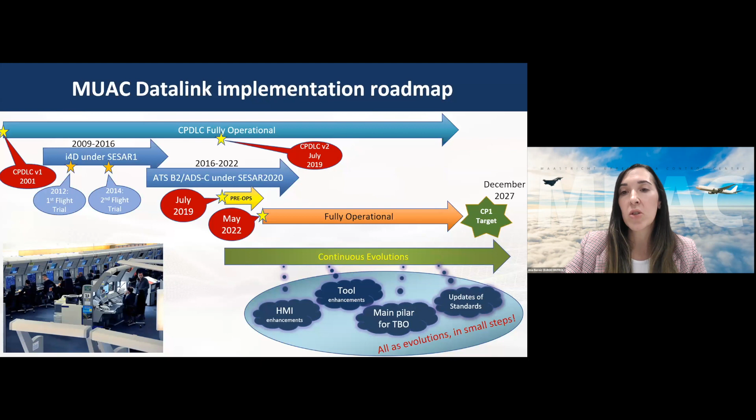And in July 2019, CPDLC version 2 became operational, and ADS-C pre-operational. Only a group of controllers had this functionality available for validation. And because the assessment was very positive, in May 2022, in the full ops room, more than 600 controllers had this functionality available on the screen. And we plan to continuously evolve what we have right now.

Here on the screen are some of the facts on Datalink, daily average of MUAC. You can see that we manage more than 5,000 flights per day. 83% of this traffic is Datalink equipped. So we have a lot of experience of that. And even if at the moment it's mandatory to log on with our center, still today, more than 50 times per hour, our ATCOs are requesting the pilots to log on. And this is a huge amount of time.

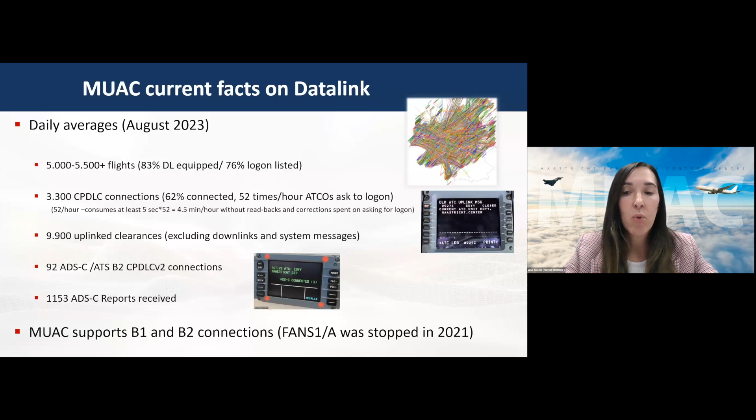Regarding ATS B2, we have at the moment only 152 aircraft equipped with this new technology. All of them are Airbus, but we expect that in the near future, for 2028, there will be other aircraft manufacturers implementing this fancy technology. And usually daily we have like 92 connections of these aircraft.

What do we present to the controllers on the screen regarding ADS-C? So controllers can see the airborne trajectory, so the extended projected profile, the EPP, which can contain up to 128 waypoints. And they also can see that graphically, it's this pink line.

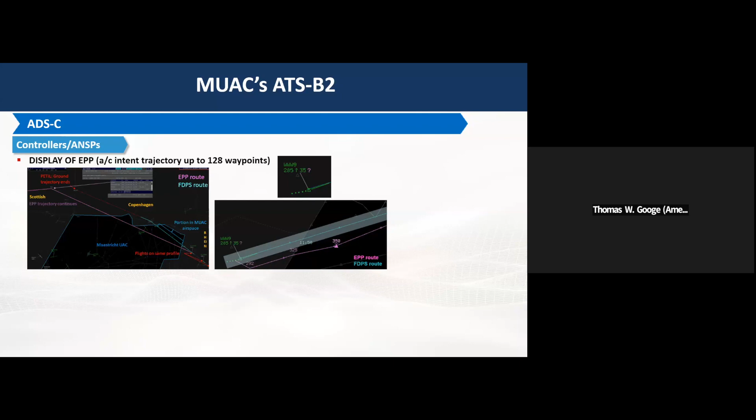Sorry, there is someone talking. Okay, I'll turn it back. Sorry.

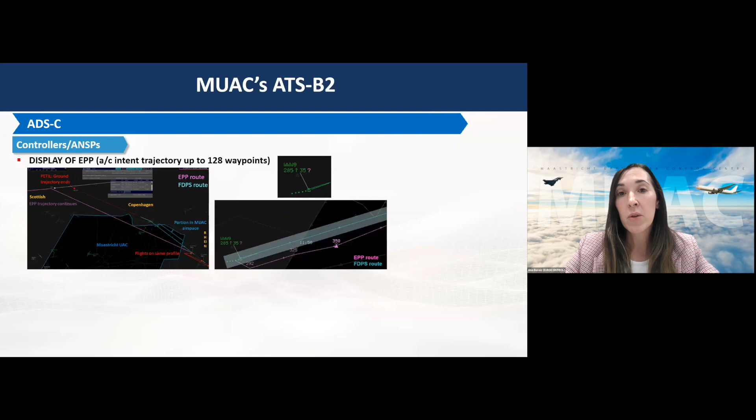Sorry, yeah, I was saying that the EPP trajectory is there on the screen in pink. And our system is all the time checking for discrepancies between the air and the ground trajectory. And if there are problems or discrepancies, then there is a question mark presented to the controller so that they can solve it.

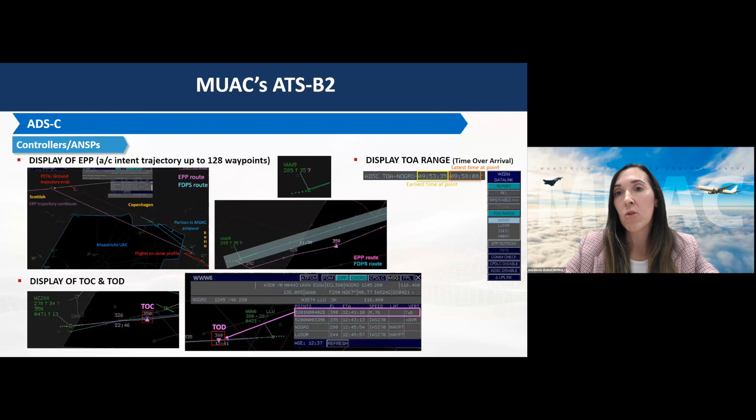They also can see the top of climb and top of descent as received from the aircraft. And they also have functionality to request an interval for the earliest and latest time the aircraft can make it over a specific point requested by the controller.

With all these functionalities, we see already many benefits for the controllers. The first one is the big safety enhancement because they have much more information of what the aircraft intentions are, the trajectory, the cruise level. We also have a workload reduction and higher efficiency because there is this push to load functionality on the aircraft side.

And that makes it easier for pilots, but also for controllers to uplink more complicated clearances. And also they can be checked that they are properly implemented thanks to the EPP being downlinked. Apart from that, we see that as the first step for automation on the system, and controllers can provide a better service because they can try to give more shortcuts when they see the EPP trajectory, even going further than our airspace. And also they can try to accommodate for less steep climbs and less steep descents.

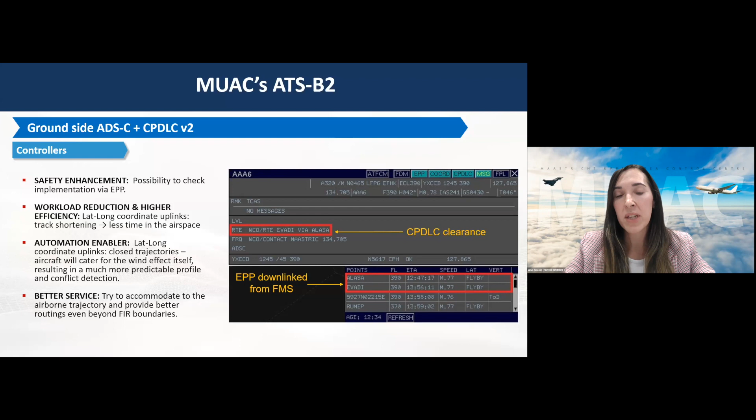For the pilots, this also brings workload reduction and higher efficiency. The lateral clearances that are loadable, it's a big advantage. And then, of course, because controllers can see much information on the screen, they don't need to ask pilots via radio for information. So at the end, this is saving also time for the air crews. And we see that with this CPDLC version 2 and the push to load functionality, we get 25% quicker response compared with CPDLC version 1 on complex clearances.

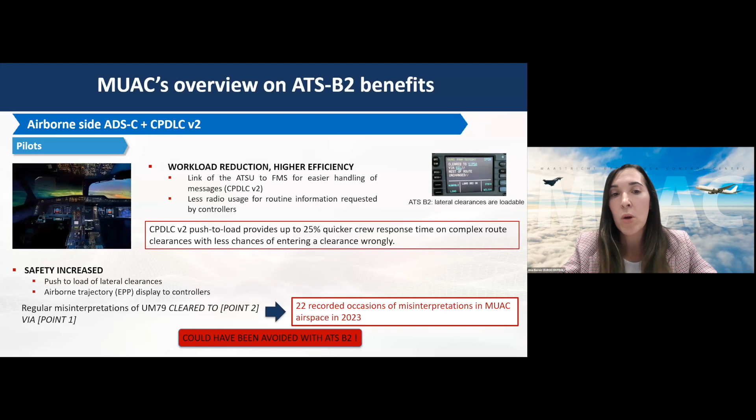Apart from that, there is also a big safety increase on the airborne side because the push to load makes things easier and there are then, of course, less errors from the flight crews. And also we have seen that sometimes there is a lot of misinterpretation on the pilot side with certain clearances, for example, with UM79, which could have been avoided if ATS B2 would have been used.

For the airlines, mainly we see the benefits of having more environmentally friendly flights because they will get more optimized climb and descent profiles thanks to the display of the top of climb and top of descent. Controllers will try to accommodate to those if the traffic allows, of course. And we have here some examples.

And also the flights can get more optimized routes and fewer miles flown, thanks to the fact that we can see the intentions of the trajectory of the aircraft beyond our airspace, and try to accommodate some coordination with the downstream centers. We can also uplink lat-long coordinates, which is a more advanced functionality only for B2 compared with B1, instead of giving longer reroutings.

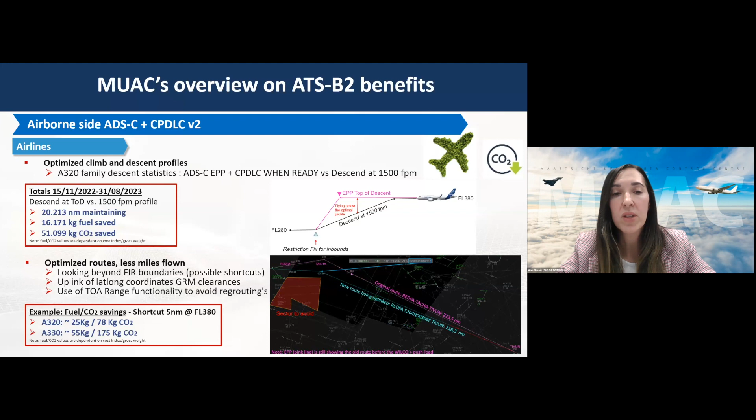For example, in the example that you can see in the bottom right of the screen, it's only a shortcut of 5 nautical miles at flight level 380, but it can mean for an A320 family a saving of 25 kilograms of fuel and 78 kilograms of CO2. And for a 330, 55 kilograms of fuel savings and 175 kilograms of CO2 savings.

So as a summary, for controllers, it's a big safety enhancement. They have more information on the screen.

The system is automatically checking for discrepancies. There is a workload reduction and also an improvement in efficiency because they are also using less the radio frequency for checking. They can provide better traffic management and better conflict detection because we are including parameters coming from the aircraft in our system to have a more accurate calculation.

For pilots, it's also a safety enhancement thanks to the push to load button, workload reduction, and also improving efficiency. For the network, we expect that because of the ADS-C common service introduction in Europe, that will provide the ADS-C information from the takeoff of the flight till the landing, we will be able to have a better prediction of sector loads and runway occupancy times, also leading to more effective traffic management in collaboration with all partners, and that will be enabling capacity increase.

For the airlines, as I was saying, the main benefits for them is that they will be saving fuel, saving CO2 emissions, and also time saving thanks to the optimization of the profiles, less steep climbs and steep descents, and also route shortcuts thanks to the EPP and the CPDLC version 2. And in general, that will make the flights more environmentally friendly, more green.

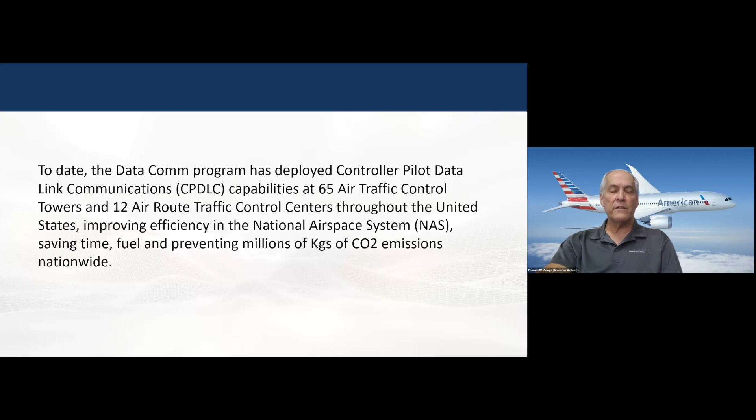So to date in the U.S., the domestic Data Comm program, we have capabilities at 65 towers and 12 air route traffic control centers throughout the domestic US. And we're going to talk about some of the statistics for time, fuel, and CO2 emissions that were prevented. So we'll talk about that a little bit and where we are with the program.

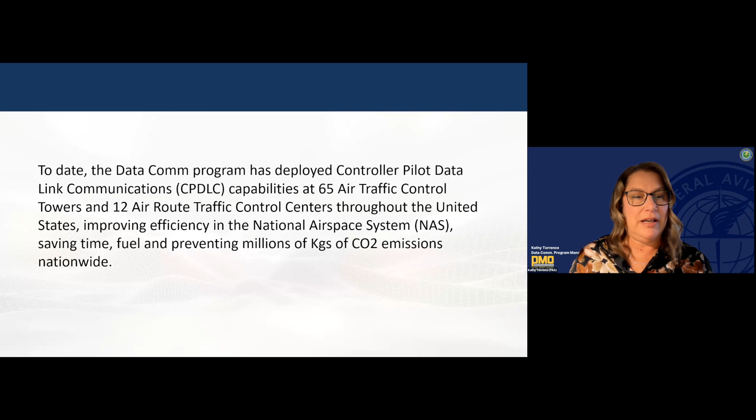So overall benefits here, again, we're providing those services between pilots and air traffic controllers, supplementing the voice communications capability. So there's no intent for Data Comm, or data link, to ever replace voice. This is a supplementary system, introducing and providing that data link between ground automation systems as well as the flight deck. And the messages that we share include clearances, instructions, traffic flow management, and also requests from the crew.

We actually have today with FANS the push to load capability already. So we're able to take advantage of those benefits that Anna mentioned are coming in the next segment of CPDLC in Europe. So again, controllers are able to deliver instructions with a push of a button, without having to be on frequency. And one of the real benefits that we see, especially with the push to load, is the transmission of complex instructions that can be directly loaded in through the push to load. And that really does save time. We'll talk a little bit about that, or what we're seeing on en route.

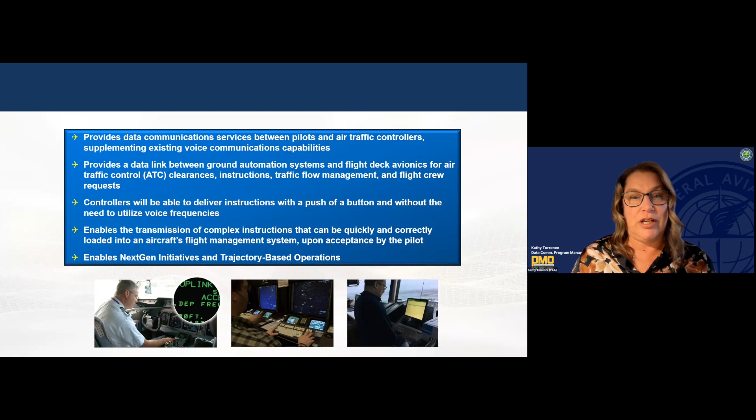And also from the US perspective, the implementation of Data Comm really provides the foundation for other upcoming NextGen initiatives like TBO and some others as well. And again, for benefits, we're very much what Anna said as well. We're reducing that communication time between controllers and pilots, improving rerouting around weather and congestion.

She had a great graphic there that showed that our controllers are able to, instead of having to go only with published points, basically trackball pick around weather or some other area that pilots need to avoid and get them as close as possible, which saves fuel. As well as we're able to increase that flexibility and accommodation of requests from users, which can save CO2 emissions. And then again, as I mentioned, we are able to provide that standard for other NextGen initiatives and TBO.

So this is where we are from deployment from a US perspective. The triangles are the 65 towers and their location. We have multiple colors going on here, so I'll explain a little bit about what that is. So for the centers that are colored in, that are green and purple, they are providing CPDLC 24/7 currently. For the ones that are purple, they have decided to accept the capability and have achieved an FAA milestone known as IOC, or Initial Operating Capability.

You'll see Jacksonville there is shaded kind of a peach color. They just started bringing up Datacom, and the good news is, as of last night, Fort Worth did the same. So we have a change in our map here. Fort Worth just came up, but in a limited capacity.

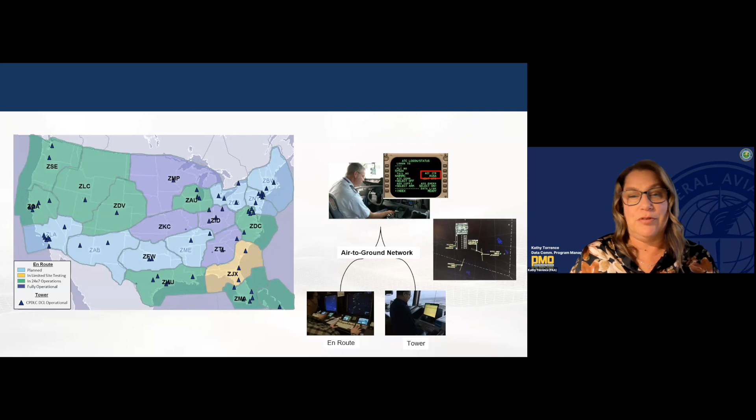Our original goal for Datacom was to have 5,000 equipped aircraft by this point in our deployment, and you can see we've more than doubled that. So we're really excited about the participation from our airline partners that are using this service. And then looking at some of the savings.

So just in August of 2023 alone, DCL at the towers have saved over 100,000 minutes of radio time, as well as airspace user time, 81,000 minutes there. We've cleared in just that 1 month alone over 272,000 flights and prevented over 3,000 readback errors.

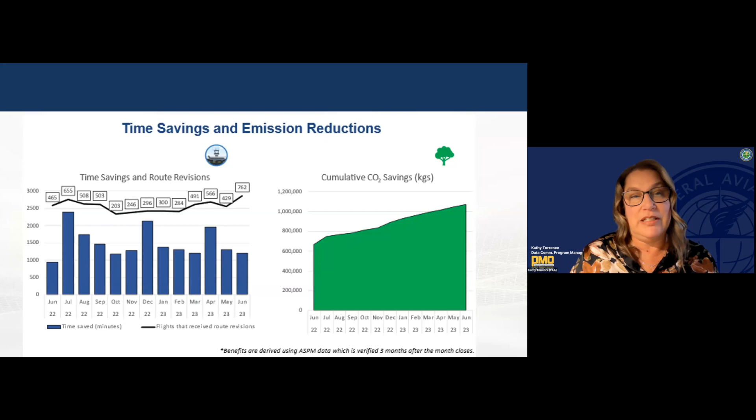And if we look at that over time, we did actually take a look at one tower in particular. This is for Orlando. And you can see on the right the cumulative CO2 savings that we've seen just over the last year. You can see on the left the time savings and route revisions. It really depends on the time of year, how much savings there is. But again, looking at overall, the numbers continue to go up. We continue to have new users from a tower perspective as well as from en route.

From an en route perspective, we've had over 34 million, almost 35 million transactions to date. We started deploying this in March of 2019. Unfortunately, we did run into the COVID pandemic, as I'm sure many other programs did. So we had to pause until it was safe for our controllers to start training again. And once they did start training again, we've really picked up the pace to try to fill in this map as best we can.

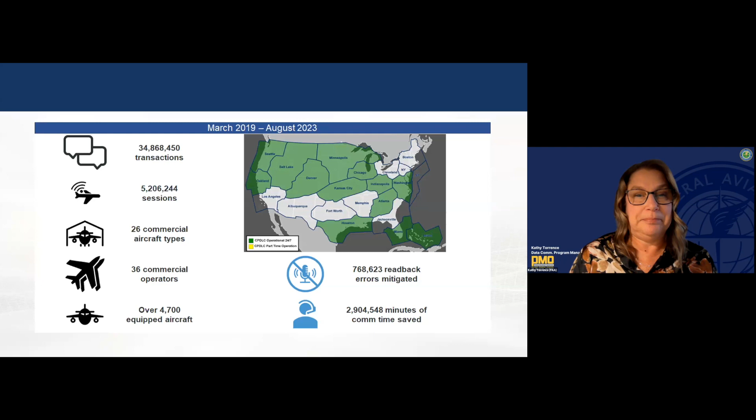So my last example I want to just talk about, and Anna actually had a much better graphic. I wish I would have had something quite as good, but this is just an example of a time when en route CPDLC was able to help one of our centers. So in this particular example, ZDC was very busy. There was a lot of weather in the area.

They had 3 AFPs. There were temporary flight restrictions, miles-in-trail restrictions, and we also had, in this particular example, 3 southbound flights who all got a similar reroute in ZDC. For the aircraft that were CPDLC equipped, that alone saved 129 seconds of communication time. So kind of going back to the push to load, right?

The amount of time that it would have taken on the radio to read that clearance and then for the pilot to physically enter that clearance, that ends up to provide pretty significant savings just on one flight. And then when we look at it across the US, it's great numbers, great savings. But for this particular example, they were able in their reroute to save 39 nautical miles, 6 minutes. And again, you can see the CO2 emissions and the fuel that was saved as well.

So yeah, we're definitely excited about rolling out Datacom. These benefits that we're seeing are tremendous. Again, our numbers are ahead of where we thought they would be. So we're really, really happy to be a part of this program. So back to you, Wes.

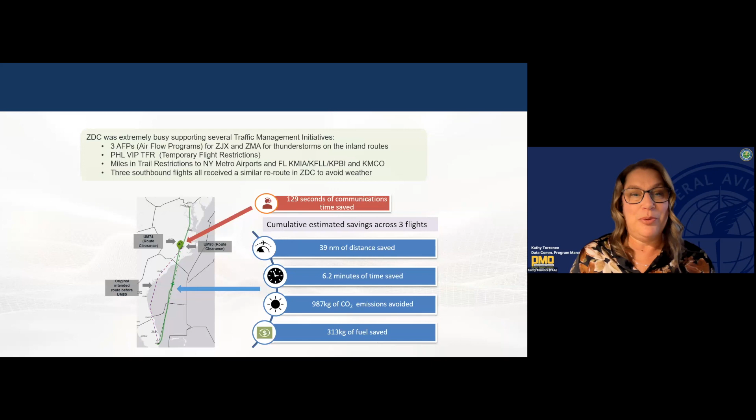Okay, thank you, Kathy. And as a user of Datacom in the US, we can say that our pilots have really enjoyed using it. They like the ability to be able to make those frequency changes and get these reroutes and be able to do that without getting into the hearback readback issue that we traditionally have fought over the last 4 or 5 decades. So it's been a win-win for us.

I'd like to introduce Rocky now, who's going to talk about Datalink standards for improving safety and efficiency. Rocky, take it away. Hey, thank you, Wes. Welcome, everybody. First, I do need to qualify. These are my own views. I'm not representing United Airlines, my former employer, or the NTSB, my current employer.

But after many years of working with RTCA, I think these are some interesting ideas that are a little bit of a gear shift from what we just heard with CPDLC, which is actually a tremendous capability. But I'm going to talk about things that cause even just minor delays or minor capacity reductions, and things like playbook routings that cause flight times to exceed block times, and it ends up disrupting the airline's schedule integrity, especially when an airline hub is scheduled at very close to its capacity, which many of them are nowadays.

And so my pitch is that the service providers need to be able to mitigate these capacity reductions and improve reroute efficiency so that we can gain back some of what we're losing as far as schedule integrity. I'm going to make a pitch for flight deck interval management, which I call the last mile of trajectory-based operations. Steve Bradford talked about trajectory-based operations earlier. And on my next slide, you'll get to see why I think FIM is such an important last mile to TBO.

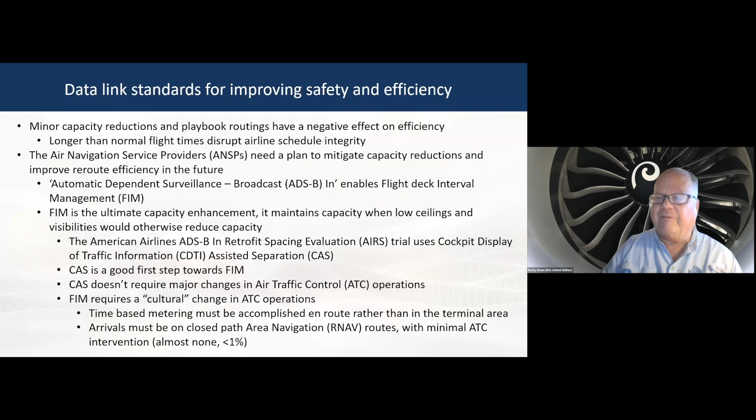airs. Well, actually, we're seeing a lot of success with this. My manager at American has led the charge at our company in working with ACSS on the development of a product that we have installed in roughly half to 2/3 of our Airbus 321 fleet. As you said, we currently have an ongoing agreement with Albuquerque Center to run interval management with designating aircraft ahead of us, and then achieve a time by a fix in the procedures that will lead into the Phoenix hub that we have. We're seeing a lot of gain with that, and controllers are starting to make that paradigm shift and get their heads around how this can help them, and they're actually finding better ways to use it, which is what we thought would happen.

As far as the Dallas program with CAS, we also see that pilots are starting to use this technology, and they're figuring out ways to use it, as are the controllers in Dallas. Again, it was another paradigm shift for people to understand that we could take this technology and actually create somewhat of a visual approach scenario, even though the weather may not be perfectly visual, it might not be a million miles and 10,000 overcast. We have the ability to designate aircraft in front of us, and therefore we feel comfortable following someone when maybe the airport may not be in sight, but the traffic we're following is clearly available to us on the CDTI inside the cockpit.

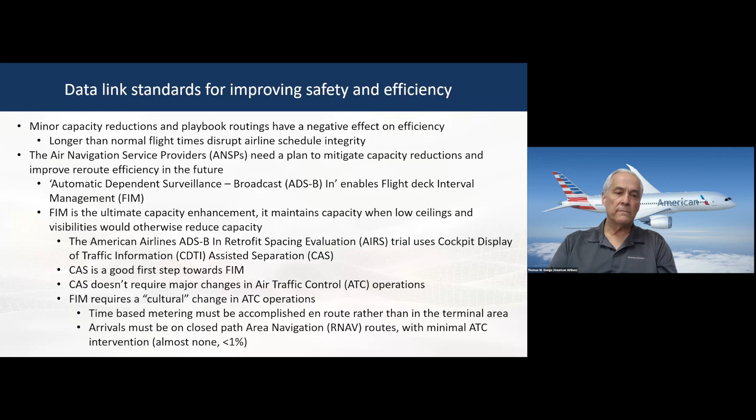Back to you, Rocky. Okay, thank you, Wes.

So I want to talk a little bit about throughput. Wes talked about the FIM that American is doing, which is actually en route FIM, which is an important step, but I'm going to jump into arrival throughput, which is really FIM down to the runway. And I've got an example here, and I think this is important just to understand why I'm trying to promote FIM as much as I am.

Today, with pretty much what we see with the tools that controllers have available, the inter-arrival time standard deviation is around 18 seconds between arrivals at the runway, and that leads to the efficiency that we see of 38 arrivals per hour theoretically. And then these next two examples are what could we see with the best possible ground-based decision support tools, and we think that you can get that standard deviation for the inter-arrival time down to 12 seconds. That would be a pretty significant throughput increase, up to 44 aircraft per hour.

But if you can meet the inter-arrival time standard deviation that FIM has in the standard in DO-361 of 5 seconds, you could theoretically get up to 55 arrivals to a single runway per hour. And the only reason that I'm really wanting to harp on this is I think it's really important to understand the effect that precision spacing on final has, and you really need a much tighter control loop than is possible with the ground-based decision support tools and ATC today. And that's why I'm trying to be a proponent of FIM in the terminal area.

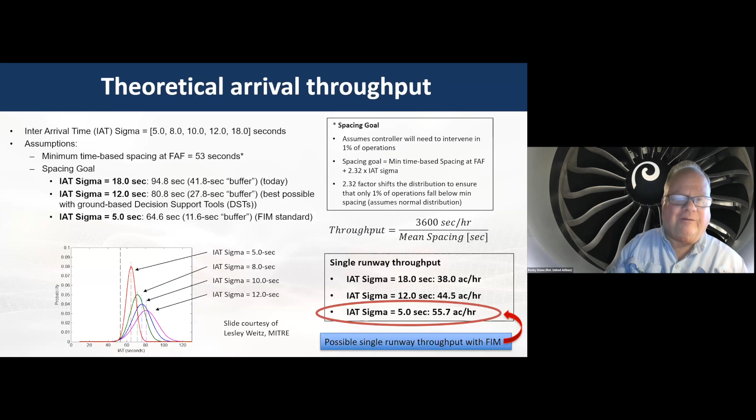Next, I'm going to shift gears and talk about another thing that can add a lot of time to a flight, and that's playbook routing. And this is actually a picture of the West Coast to New York City playbook routing, and you can see from lots of different origin places, and you can kind of visually see that it's quite a bit out of the way. It would not be unusual from Southern California to have this kind of a playbook routing add an hour of flight time. The good news is it doesn't happen all that often, but during convective season it's a rare but normal event.

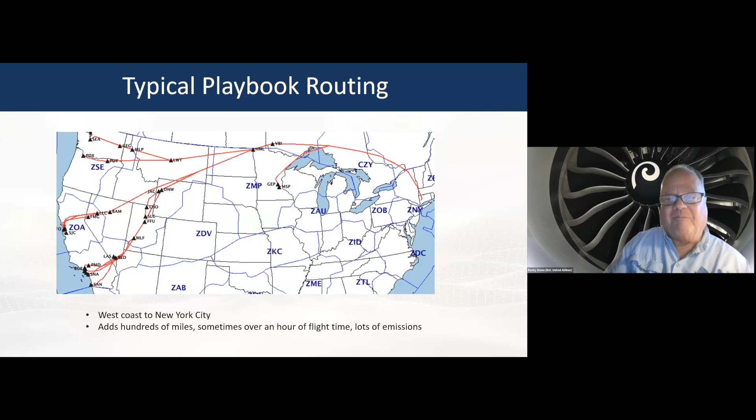So my pitch with this is the next slide. SC-206 is working on an airborne reroute information service, and it's trying to specify the minimum information content that a pilot needs to be able to make legitimate and useful inputs into the rerouting situation. And the only point that I really want to make on this is, SC-206 is working on it, and I hope those interested will join the group. But it really is going to take the CDM community within the FAA, at least, to embrace the concept to allow for its use. So without that, it's really not going to go very far. So hopefully, that will happen.

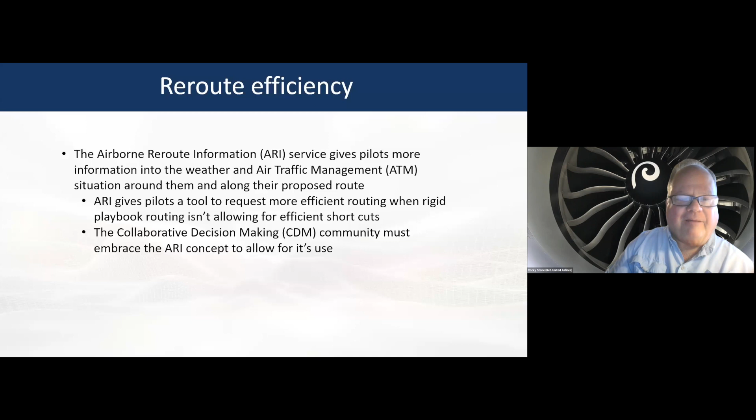And then the last thing I want to talk about is a little bit about leadership, and this kind of touches on what Tim Murphy and Steve Bradford were talking about earlier, as far as what does it take to implement new technology. And I've offered two different things today that I think would go a very long way to improving safety and efficiency and mitigating the schedule integrity issues that airlines have, when benign ceilings and visibility cause a 10 or 15% capacity drop at an airport. CAS and FIM are both things that will really mitigate that. And then the ARI offers the possibility of improving the efficiency or allowing ATC to be a little bit more nimble with rerouting around convective weather as the situation is changing.

But my last pitch, and this kind of goes back to the plan that was laid out this morning, which is why I'm pretty excited about what's been going on today, is that there needs to be a clear roadmap that goes all the way to embracing these capabilities. And that would really allow operators to make intelligent decisions. The roadmap needs to be: how do we interoperate with today's system? How do we mix FIM in with non-FIM, which is going to be huge. And how do we get from what American Airlines is doing with their AIRS program to the ultimate end, getting the most efficiency out of the system with CAS and FIM.

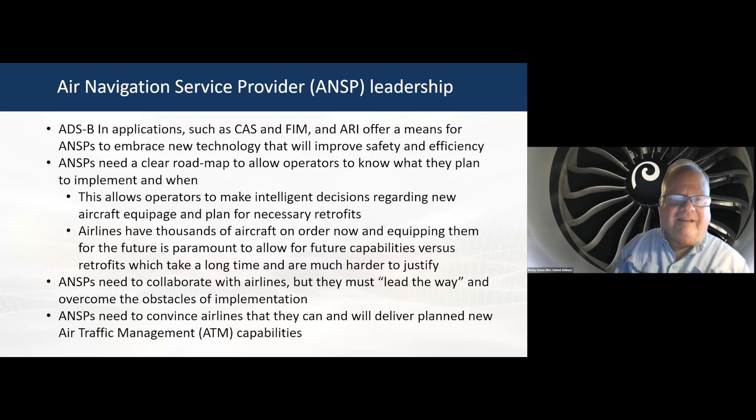All right, Rocky, thank you. Great presentation, and we certainly concur with your opinion. We'll talk about that more later, maybe in the Q&A. This time I want to turn it over to Kieran O'Carroll at IATA to talk to us about the future as he sees it from IATA's perspective. Kieran? Thank you very much, Wes.

If I may, I would like to take 3 points from the presentations and panels that were made earlier this morning. Tim Murphy from Boeing talked about the fact that in the 2035 timeframe, the infrastructure and the aeronautical spectrum we currently have will not support the amount of data and the types of data we will be transmitting air-ground, ground-air. So clearly we need to do something about that in terms of standards and green operations.

Claude from Airbus talked about the use of potential commercial, therefore telecommunications infrastructure, to offload the aircraft services and data that don't particularly require a safety of life standard. So there are opportunities, of course, in the 2035 timeframe to do something like that.

And basically, Steve Bradford spoke about something that's near and dear to my heart, which is offloading the triple stacking of aircraft to ground infrastructure. There's no reason we need to be triple stacking aircraft in 2035 so that they can operate transatlantic, for example, or in Asia Pacific. So the use of ground cloud infrastructure mainframes to do all the necessary translations will give us a much better opportunity to lighten the aircraft, green the aircraft, and save fuel.

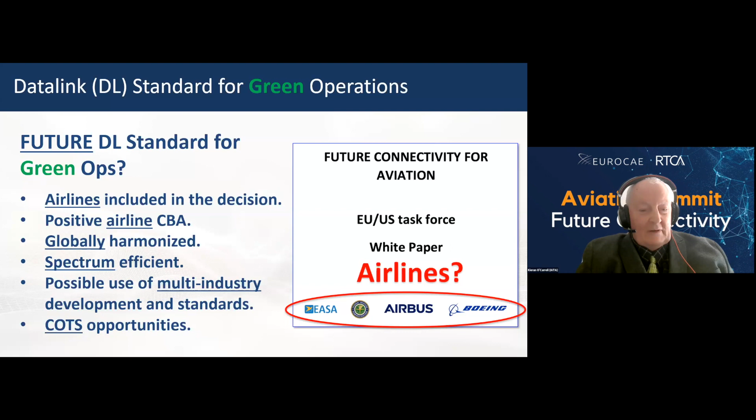Let me see if I can advance the slides. Yes. So this slide was used quite a lot. The only comment I would make is that airlines simply can't afford to pay for a multitude of standards. We heard this morning that FANS is basically the standard in the United States. We're talking in Europe about ATN and ATN-B2, ATN-IPS at ICAO. The airlines simply can't afford to pay for all of this and to stack the aircraft with each of these systems. So when I look at this chart, I see an opportunity.

We basically need to create technologies in the 2035 timeframe. I'm reminded that John F. Kennedy gave NASA, what was it, 8 years to land a man on the moon. I appreciate there was a lot of money involved in that. However, in 2035, surely we can do better than this.

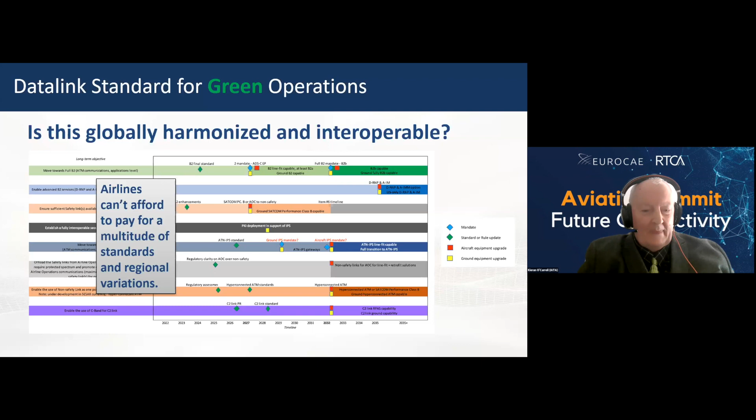Now, IATA is moving forward beyond RFI, beyond radio frequency interference. Nobody, I guess, on this call needs reminding that the telecommunications industry is moving at a tremendous speed. Your phones change every 18 months or less. The telecommunications industry has spent literally billions of dollars on spectrum, and they are moving into our domain. They are moving into aviation, whether we like it or not.

And in that document, we will recognize the fact that there are opportunities in the 2035 timeframe to collaborate with the telecommunications industry in terms of the spectrum usage, in terms of the technology, and as Tim Murphy talked about this morning and others, simplifying the aircraft avionic infrastructure to the point where all the computing grunt work is on the ground, and we can basically simplify the aircraft in terms of avionics and weight.

Now, let nobody be under illusions. Changing standards is a cost to the airlines. And clearly, 5G was a classic example of how things can go badly wrong. IATA estimates that 5G has cost the airline industry $637 million. And that was just simply for the rad-alt upgrades. So we can't afford to do this with every other system on board, every other avionics system.

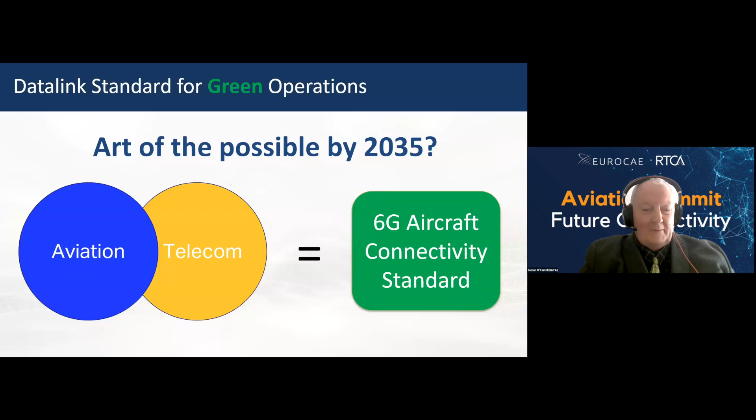I'd like to ask all our panelists to turn their cameras back on and we'll join back in a roundtable discussion. I don't currently see any Q&A, but I did want to comment on a couple of things you said, Kieran, and it's kind of been the theme. The air transportation industry in this country and around the world is looking to provide connectivity for people to get from point A to point B as easily as possible with the schedules that they want, because we're a customer-based service provider.

But at the same time, we provide a level of safety that has to be recognized and acknowledged around the world, because what we do involves safety of life. We're taking people and putting them in an airplane, taking off and moving to other parts of the world. And so there have historically been safety implications, and we have all strived to give the most possible safe travel to the traveling public.

So to your point, Kieran, I think about the collaboration. To me, collaboration is important because I've been involved in the 5G discussion, and at times it's been complicated. Let's just put it that way. But the bottom line is there has to be a recognition on both sides of what each group brings to their own table, and a recognition of what others, especially in our organization, have to deal with as far as safety implications.